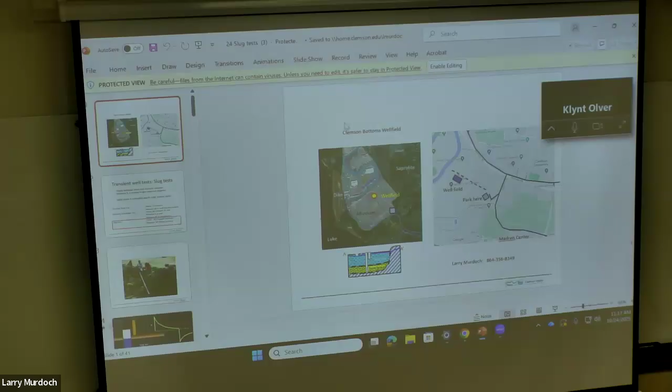So the plan we talked about last time was to meet next time out in the field to learn about conducting a slug test. That'll be what you'll do for homework 10.

I've been checking the weather forecast, and it looks like this nice stretch of sunny, warm weather we've had is going to be leaving. Right now the forecast for Monday is mid-50s with rain, 90% chance of rain. I don't want to do this in weather like that - it would be unpleasant.

It may change, the forecast may change, but I'm thinking we probably won't be going out on Monday. We'll have to push it back. Maybe Wednesday - the forecast right now for Wednesday doesn't look all that much better. So this might get pushed back to Friday, a week from today.

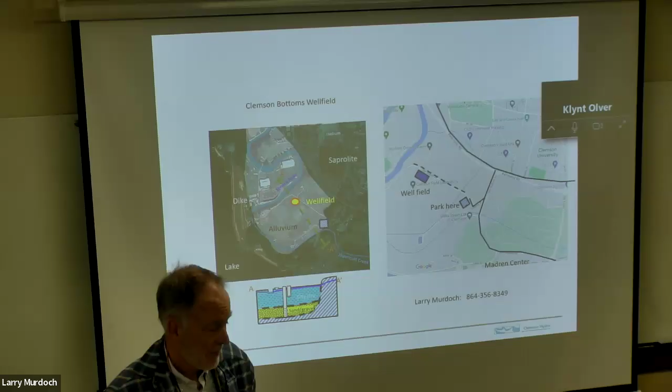It's kind of a grassy field, a pretty nice place, but if it's wet you want to wear the right kind of shoes, and if there's a chance of rain you'll want to wear something appropriate. So you want to know ahead of time to be ready. If I send out an email on Sunday, is that sufficient time to be ready?

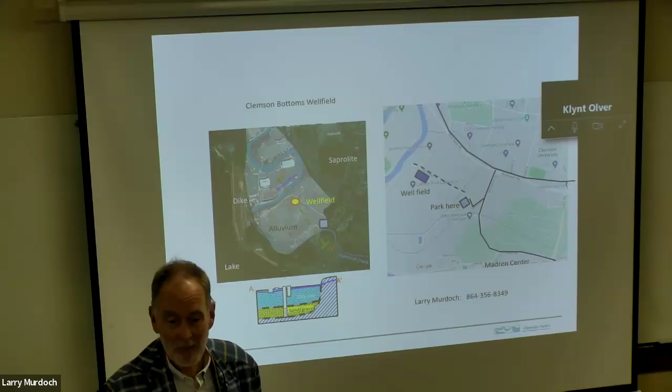All right, so I'll do that. And if I say it's a go on Sunday, and then it's actually raining Monday morning, I may cancel it and postpone it. We've done it in the rain before, and we don't want to do that. So stay tuned Sunday.

I'll send out an email on Sunday saying that we're going to go. If you don't get that email, then we'll meet here. So the default is here, not down in the field site.

On the handout there's a map to get to the field site. This is Perimeter Road. We're like right here - Perimeter Road, and then Madren Center, Old Stadium Road here. There's a traffic light right there. I think there's a new road that comes in now. So you can come here if you're driving, come here.

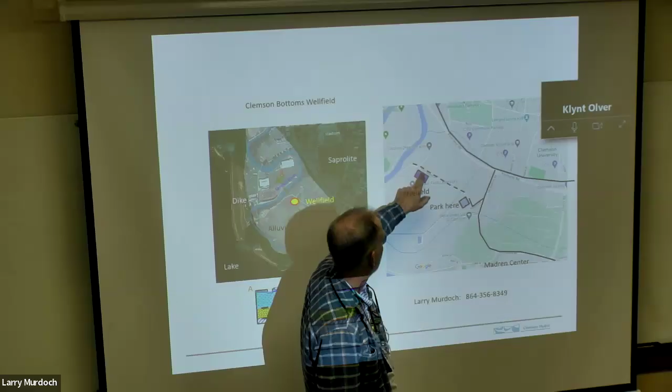This is a gravel road, and there's parking down here. So come in here and park right there, and then this is a gravel road - you need to park here and walk in. The well field is right here. If you're walking, come down here, and there's an embankment here. You may be able to get down that embankment - there used to be stairs, but I'm not sure about that. You can come in this way if you're walking too.

So this is a map of there, a location map. This is more of a geologic map. Lake Hartwell is out here, and this is the dike for Lake Hartwell. This area right here, even out kind of this region right here, is below the level of the lake.

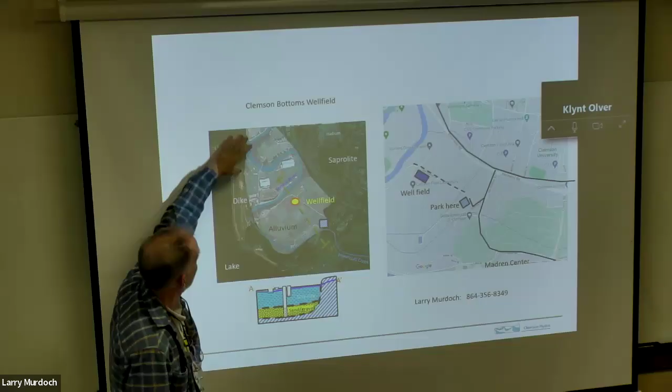So here at the well field, we're about 10 meters below the level of the lake. The Seneca River was like, it's here - it's cut off by the dike. And there's another dike up here that you see when you go along 93, and that cuts off the other end of the Seneca River. So this area right here is the floodplain of the Seneca River, the former Seneca River - it's not really just a little piece of the Seneca River anymore.

So this is all alluvium, like what we talked about from the coastal plain. It's a bit different than what we typically have throughout the Piedmont. We talked about the Piedmont conceptual model, and here it's more like the conceptual model from the coastal plain.

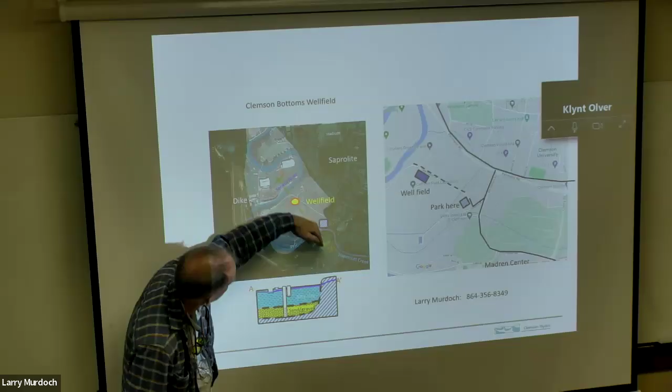So there's a cross section right through there, and this is the cross section. Here's the Seneca River right there, and then this is the well field. We have wells that go down here into a sand and gravel layer that's about 30 feet deep. It's about 10 feet thick.

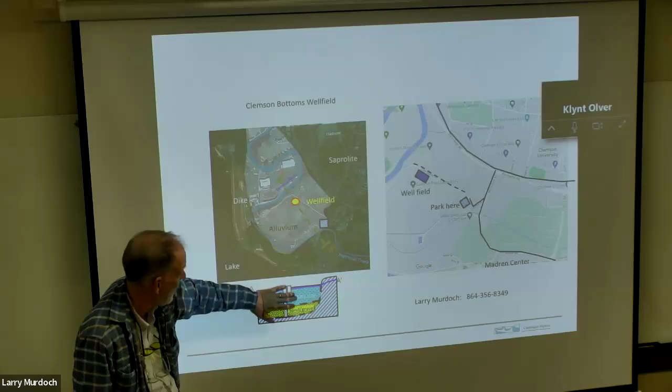And that's this confined, semi-confined aquifer. Then over that is some silty clay, and the water table is very shallow - it's just a couple feet down here. So the water table is right here.

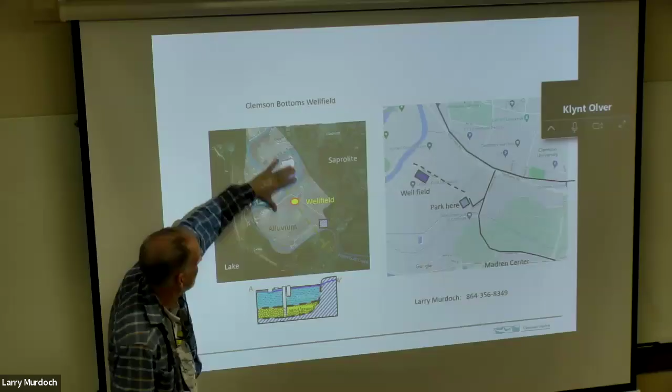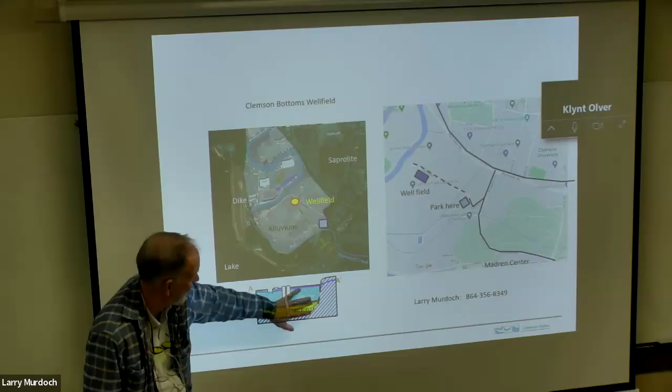This is all sediment that was deposited from the old Seneca River. The Seneca River was meandering back and forth over this whole area, eroding and then depositing this sediment. So it eroded out here—this is saprolite, and the river eroded it out and then deposited sand and gravel, and then finer grain material on top of it.

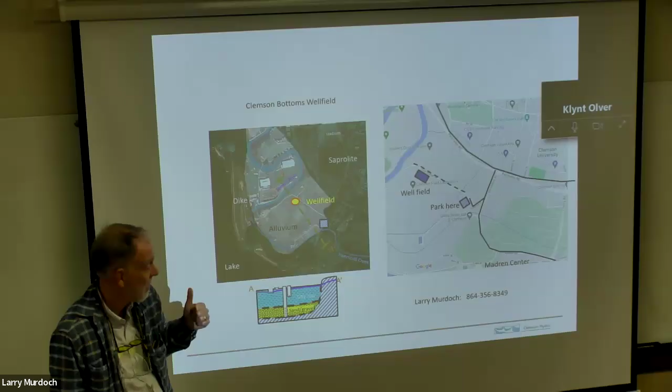So what we're going to do is test wells—some of them will be in this sand and gravel, and the permeability is really high. And then we have some wells up here that are shallower in this lower permeability, and we'll also test those. Okay, so that's the plan.

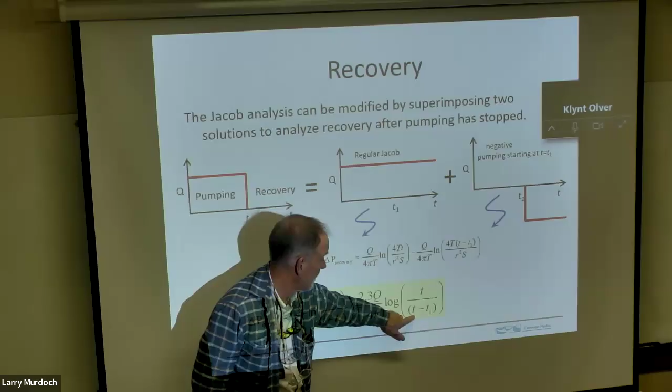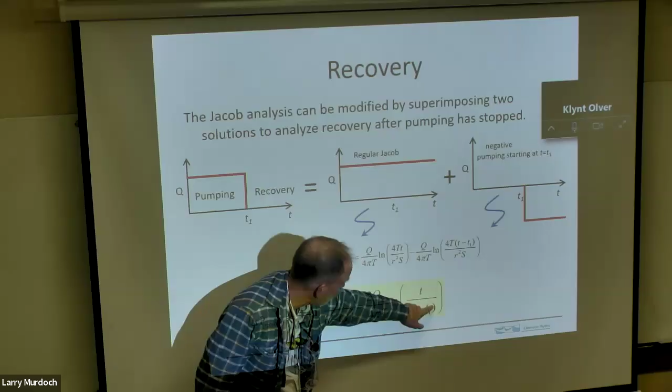What we saw is we could use superposition in time, and it gave us an equation like this, where we have this as a function of time divided by—this is the time since pumping started, and this is the time since pumping was stopped. That is the actual time when pumping stopped, and this is the time since pumping started. So basically what this is, is time that starts right here—this is 0 right here, and then it increases as you go on.

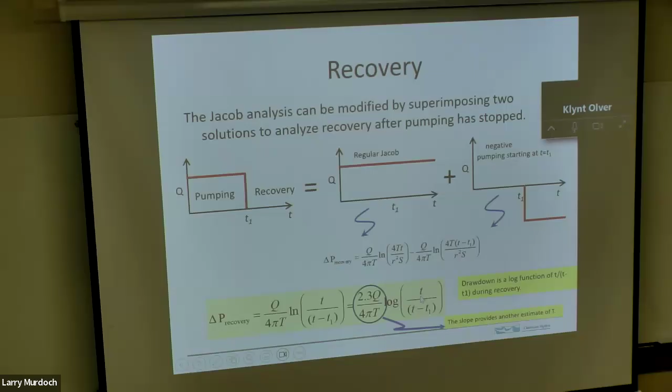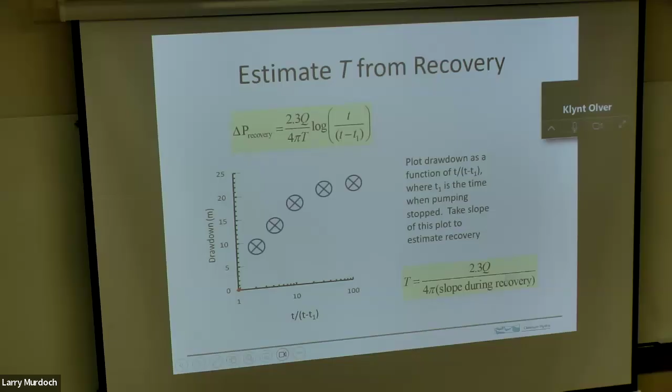There it is. Okay, so we went through this—here's the semi-log slope. I think when we did this, we saw that there was a slope of 9, and then when we did this one, it was a slope of 10. So a little bit different values for slope.

All right, so there are a couple more things that we're going to want to get from the constant rate test.

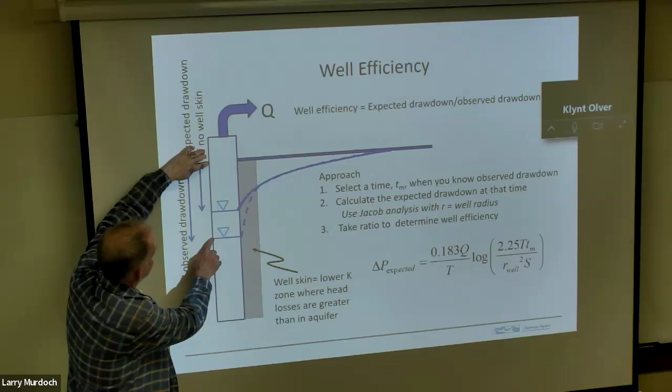So it's this drawdown divided by that. When the drawdown we're actually seeing is greater, we have a well efficiency that's less than 1. That means there's some kind of skin around the well.

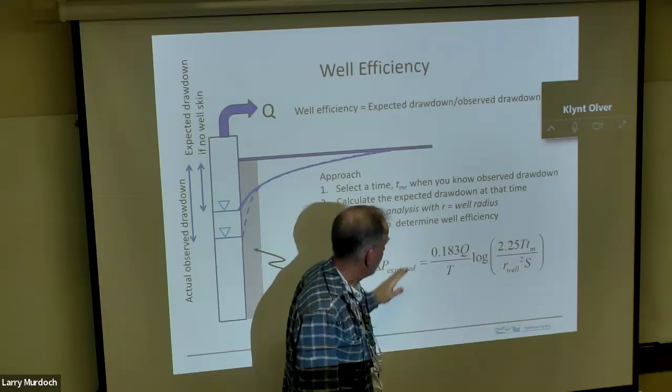The way we calculate that is to do the analysis we saw last time, where we fit the semi-log slope and get T from the slope, and from the intercept we get S.

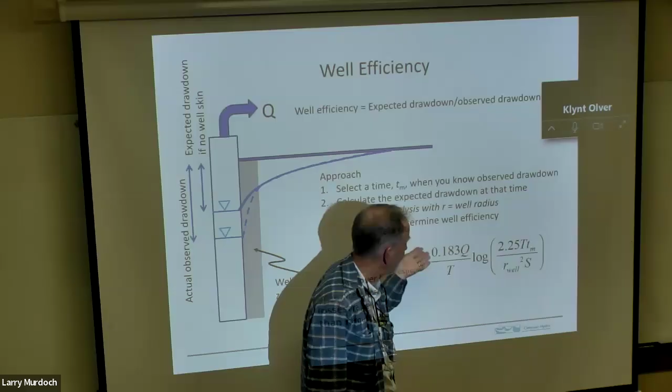Then we take the results of the test, typically towards the end, and use this equation to predict what we think the drawdown should be at the well. The important thing is that we put in the radius of the well, and there'll be some time when we measure the drawdown, and we want to use that same time here.

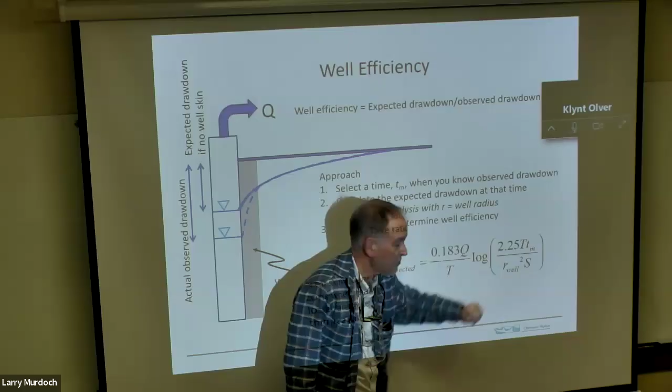So we put in that time, put in the radius of the well, and predict what the drawdown is. This is the drawdown expected if the entire formation has these properties. We do that calculation, take the ratio with the actual measured drawdown, and that gives us the well efficiency. That allows us to relate the drawdown we would calculate from what actually happened.

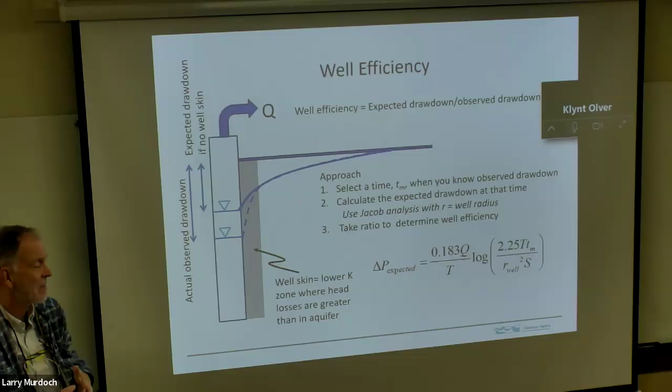Another effect we want to evaluate is well performance and longer term well performance. The kind of results we've been looking at here we can get from pumping the well for an hour, a few hours, short term, maybe a couple days. But if we use the well for the long term, our assumption for the analysis is not going to hold.

Our assumption was that the aquifer is infinitely large in lateral extent. So we start pumping, the drawdown goes out, and so long as the aquifer is uniform and we don't encounter any changes, the well thinks it's in an aquifer of infinite extent. No aquifers actually are, but if the actual extent is much bigger than the radius of influence, then the well thinks it's in an aquifer of infinite extent.

We can use the analysis. But the longer we pump, the bigger the radius of influence, the more likely we're going to interact with some boundaries. And that's going to change the well performance compared to what we were analyzing when we assume it's infinite.

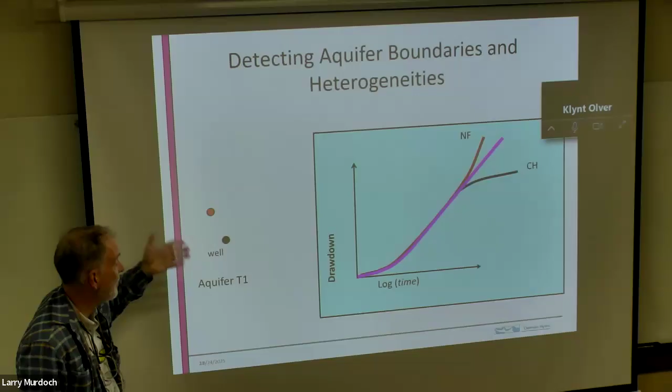Similarly, if this is a stream and this is a shallow aquifer, then when the drawdown reaches the stream, we can get water out of the stream instead of out of storage. That means the drawdown could be less than it would be otherwise. So those are some things that can affect the drawdown.

In all three of these cases, up to a certain time, the well thinks it's in an infinite aquifer. It doesn't know about the boundaries yet, so we can use this to estimate the aquifer properties. But after that happens, the slope is no longer going to give us the transmissivity.

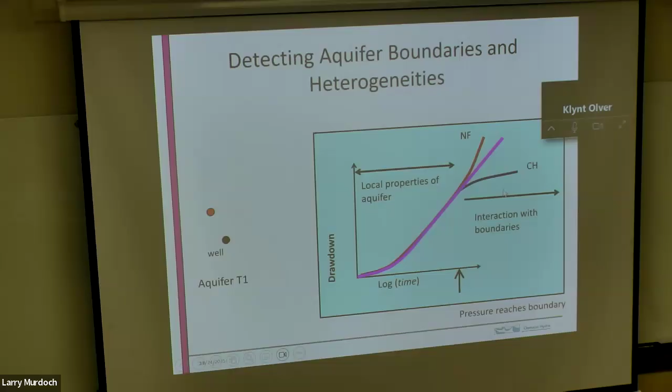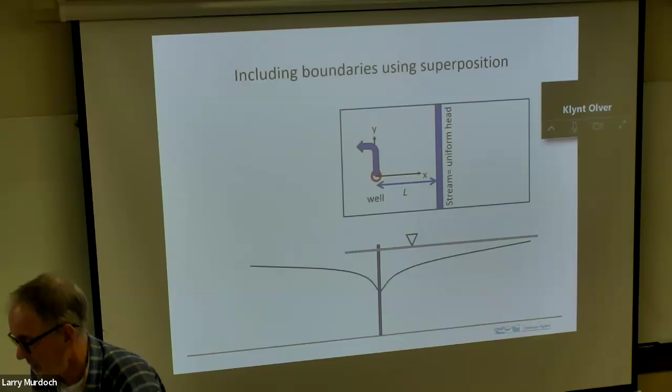So we can analyze this case too. We can do the analysis where here's the well, here's a boundary, and we can use the same process of superposition that we used for recovery. What we did before was superposition in time, but here we can do superposition in space. So this is a cross section of a well with the drawdown, and it's infinite extent, so it's just continuing on.

So the way that we include a constant head boundary right here is we use what's called an image well. This is an imaginary well that we put in here, set away from the boundary the same distance that our well is from the boundary. So if the well is a distance L from the boundary, then this image well is also a distance L from the boundary.

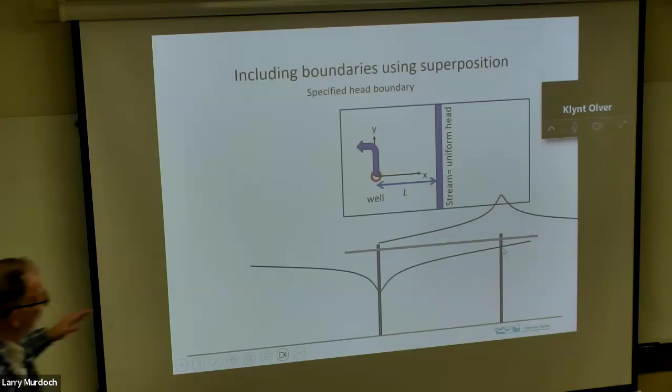It's a distance equal to 2L from this well. Put in that image well, and we say that if we're pumping out of this well, then we're pumping into this well. So if the water level starts here, at some time the water level from this well has dropped to here. But here, if we're injecting, the water level rises and it looks like that.

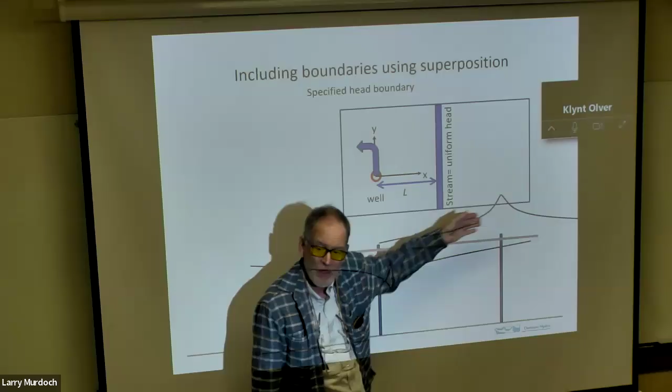I just took these lines and flipped them over and dragged them over here because these curves are the same, just mirrored and slid over here. But the important thing to see is that right here, the drawdown is equal to the buildup here. These are equal, so if we add them together, it's 0.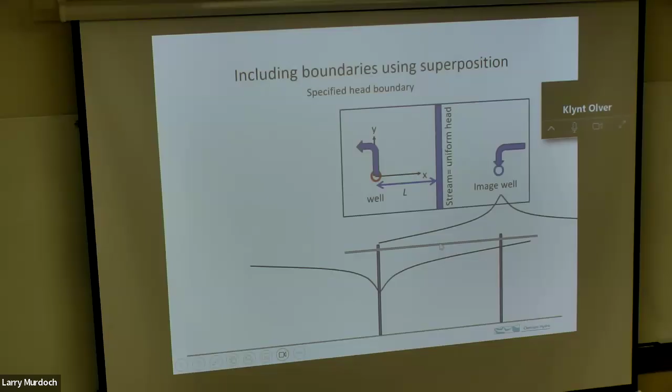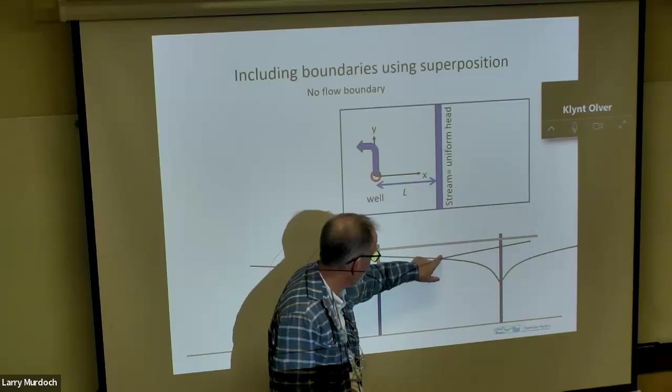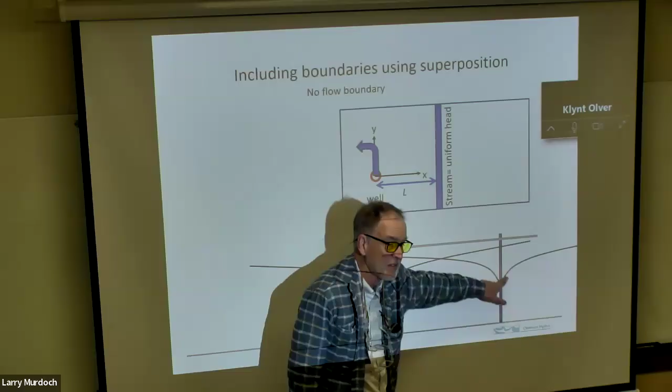So we add these two functions together. There's the image well. If we add them together, the drawdown will be equal to 0. If we do this, and we say this is a pumping well, that's a pumping well, and we add these two together, then we get more drawdown here. But the thing we see here is that the drawdown would look like that, so there would be a no flow boundary right here. The slope would be 0. So we can do this kind of superposition to make a no flow boundary.

We do the other kind of superposition, where this has an injection well, to make a constant head boundary.

Here's the way we can set this up as an analysis. We say that the total drawdown is equal to the drawdown from the well and the drawdown from the image well. So here's the well, just the Jacob analysis, and then here is the well where we go from r squared to x squared plus y squared. We've got to use an xy coordinate here, and that's just the change that we do there.

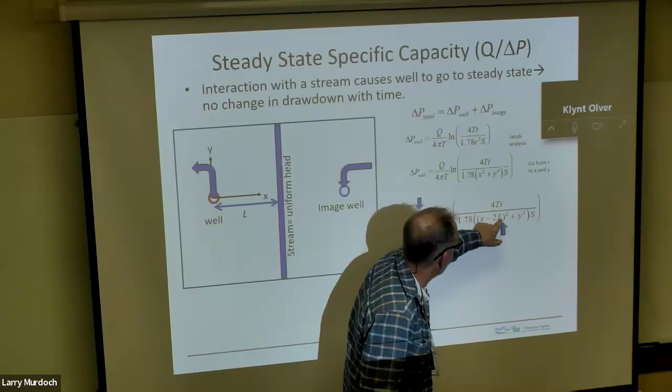There's the image well. For this image well, what we're going to do for the drawdown, we're going to change the sign, and then instead of x squared, we make it x minus 2L squared. X minus 2L is just like taking this well here and sliding it over to here. So this is the equation for the drawdown around the image well, essentially identical with the change in sign and this slight change in the coordinate system. But that's the key difference.

So we put these two together, and there's the x squared, y squared, there's the x minus 2L squared, and there's the negative sign. When we bring these together, we have the log function, and if we take this log minus that log, it's basically going to be the log of this times 1 over that. That's what you get when you factor out this thing, and then it's log of that minus log of that, and it just becomes basically this divided by that. There's the x squared, y squared in the denominator, and there's this thing here in the numerator. That's what you get for the drawdown.

Here's that result. If we take it, we say y is equal to 0. What we want to do is get the drawdown at the well, so y is equal to 0, and x equals the radius of the well. Let me show you how to. So we say y is equal to 0 at the well, and x equals RW.

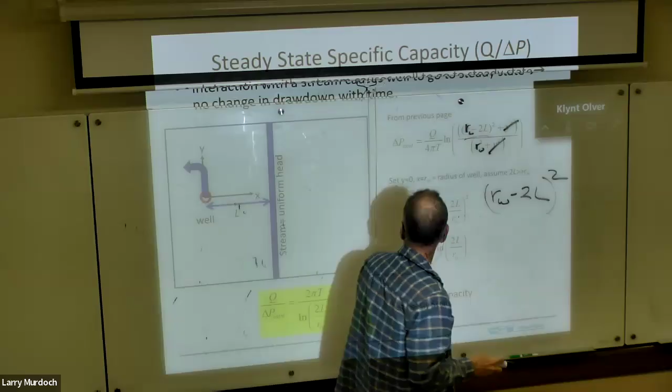So right here, we have RW minus 2L squared. What we're trying to do is get this simplified so it's more convenient for calculation. This is the radius of the well right here, and 2L is this distance. So RW is way smaller than 2L.

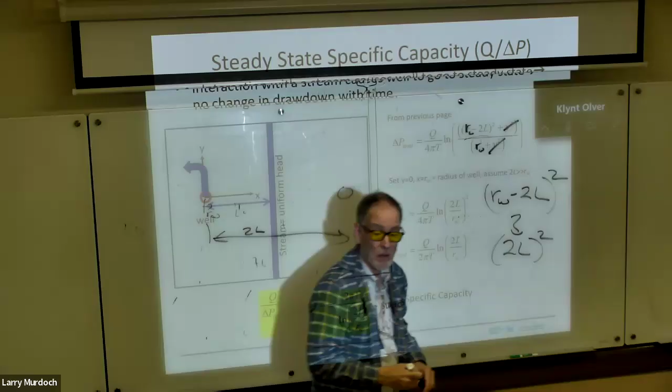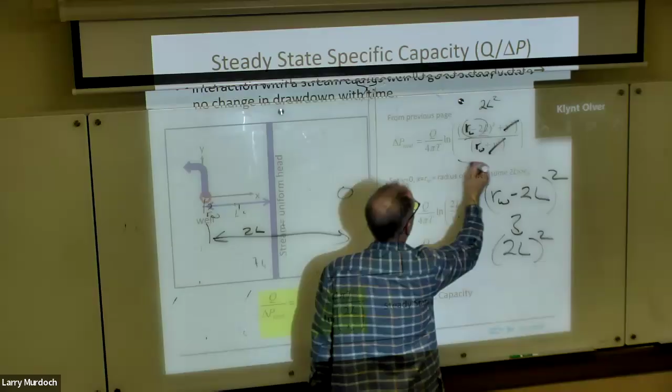So if we take the difference of this, we can just say that this is going to be approximately equal to 2L squared. So this thing then becomes 2L squared, and this is RW squared. So this thing here just goes to that.

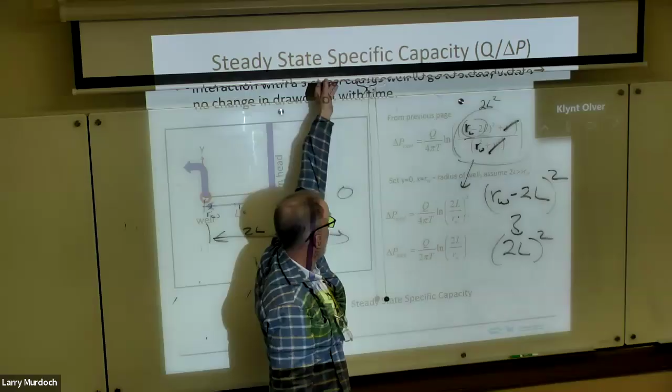And if you take the log of this stuff, the 2 comes down and you have that. So this is the total drawdown here at this well as a result of this boundary.

So what we can do is go back and recall this quantity of specific capacity. This is the pumping rate we can make from a well as a function of the drawdown, so the ratio of pumping rate to drawdown. We bring this over here and invert it, and that gives us the steady state specific capacity.

So if we want to evaluate the performance of the well in terms of how much water it might be able to produce at steady state, we can do this calculation, and this gives us an estimate of the drawdown based on this ratio.

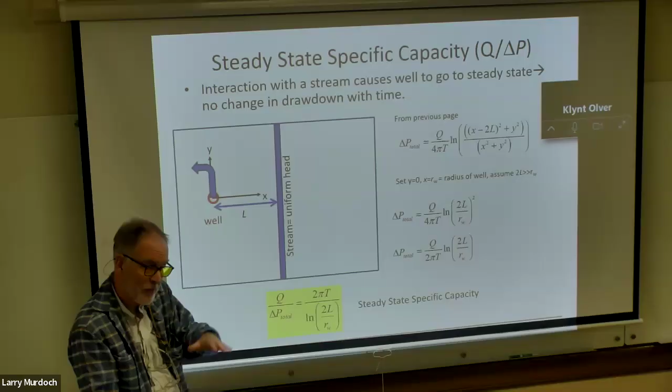So in order to get what the actual flow rate is, we need to say what kind of drawdown we're able to tolerate. This is based on how deep the pump is. We have to keep the water level above the pump, usually several feet at least. So we specify the maximum drawdown we can tolerate, and that allows us to estimate Q.

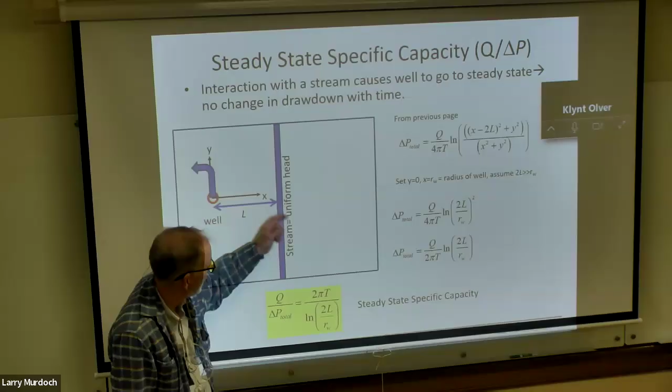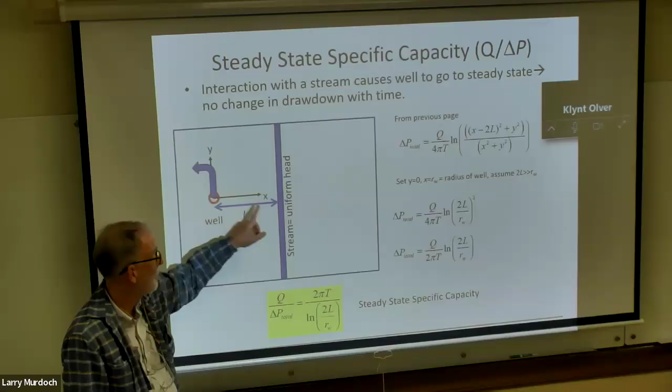We go through and do the analysis, come up with T like we talked about, and then what we need is the radius of the well and this term L, which is just the distance to the stream. So this gives us another simple way to evaluate a pumping test and estimate the well performance.

So we had this as an example, and we've done the analysis for T and S and the recovery. I went in and did this out by hand.

Here's T and S, and then the well efficiency. This is the well efficiency calculation. This is the Jacob analysis.

I have the drawdown after 1,000 minutes. I think this is in the handout. We're given the drawdown after 1,000 minutes. The radius of the well is 0.25 feet. This would be the handout from yesterday or from last time.

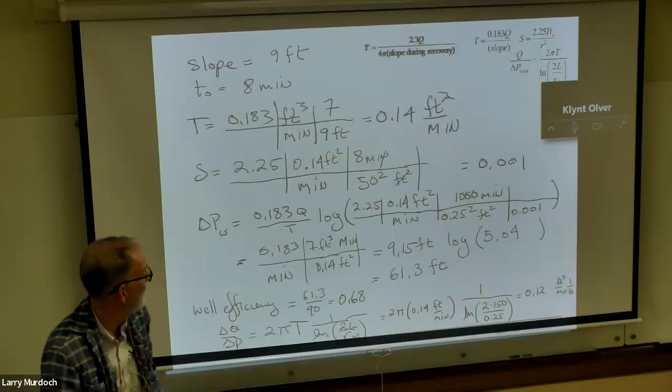It looks like what's given in the handout is that the drawdown after 1,000 minutes of pumping is 90 feet. Does that sound right from last time? I don't remember getting this handout. Yeah, it's this handout. So the drawdown of a well is 90 feet after 1,000 minutes, from last time.

So there's 1,000 minutes for the time, this is the radius of the well, and we go through and do the calculation.

I calculated this part here, writing the units out, and got 9.15 feet. And then the log here, this is going to be dimensionless. This part here, the units have to all cancel out. That's one of the rules for the argument of a log.

So we can check and make sure that's the case. I wrote this all out with the units just to check. And then I got 9.15 feet from this coefficient up front and log of 5, and it ends up being that. So 61 feet of drawdown is what we would expect if the transmissivity is equal to that everywhere. In fact, we see that the drawdown is this, so we take the ratio, and that's the well efficiency.

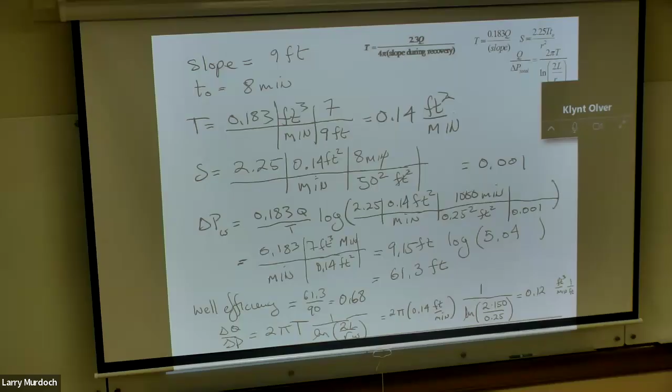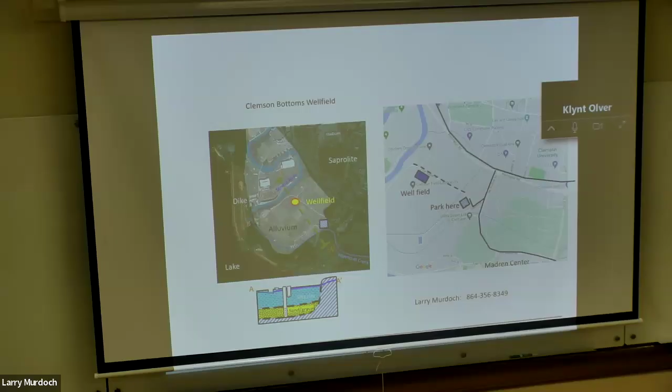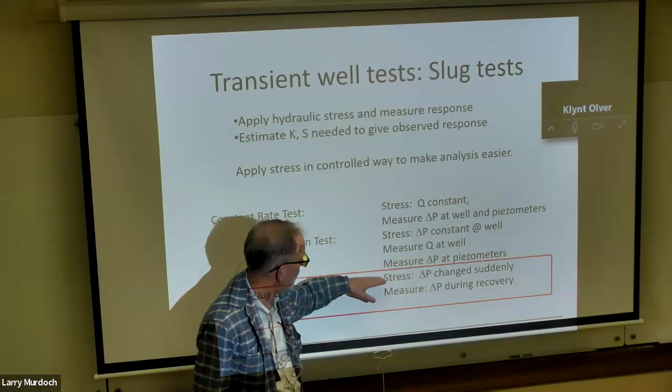Okay, so what we're going to do when we're in the field is conduct a different kind of test. This is called a slug test. We look at constant rate tests, and the slug test is the response of the aquifer to a different kind of stress. In this case, we're going to change the drawdown suddenly and see how the aquifer responds to it.

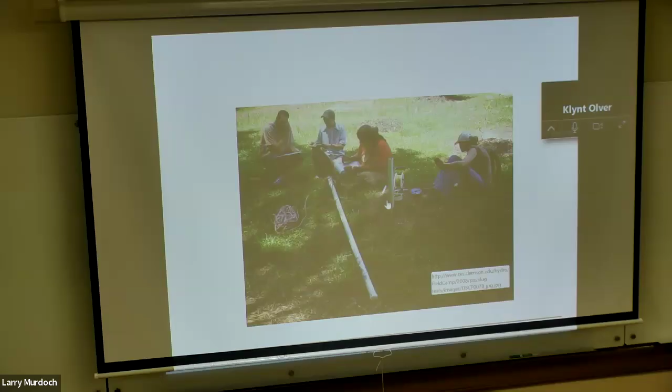So what's being done here is to take this weighted cylinder and drop it into the well, and it'll displace the water. The water level will rise as we drop it in the well. I think here's a graphic. So we take this cylinder, drop it in the well, and that raises the water level.

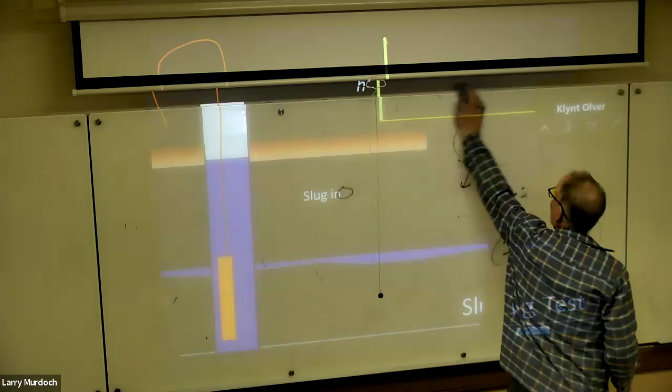So we start out here, and this is the initial water level. The system is in equilibrium, and we drop the slug in. That displaces the water up here. So at this point, we've got a big difference in the hydraulic head.

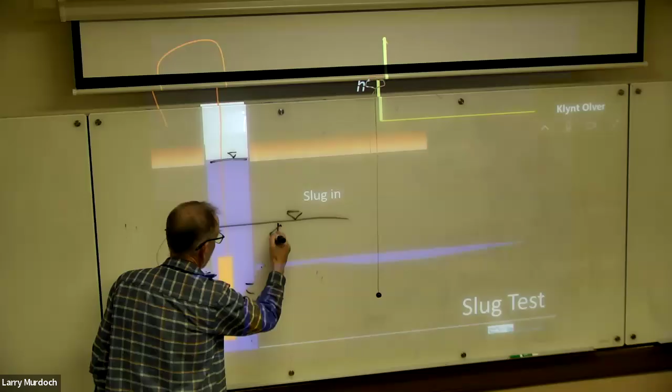Here's a confining unit, so the screen is here. The head right here in the aquifer at that point is there, but in the well it's here. So there's a big gradient in hydraulic head between the well and the aquifer, and that causes water to flow out into the aquifer, which causes the water level to drop.

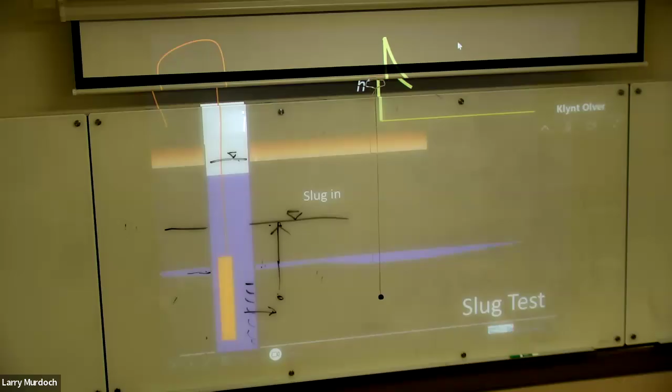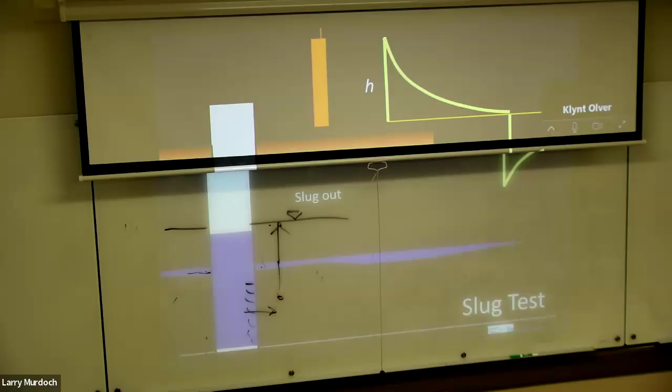Up here, this is the hydraulic head, so the head in the well is dropping, and it keeps dropping, and then we pull it back out, and the water level drops as a result of the slug coming out. Then the water level is now below the static water level in the aquifer, and it comes back up.

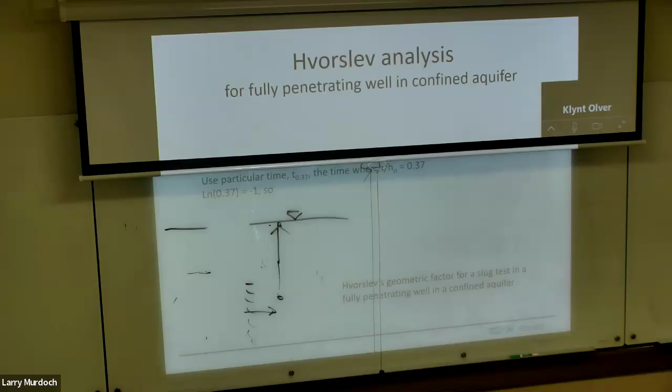Got it. Okay, so what we want to be able to do is analyze this, and there are a couple of different ways of doing this.

What you find is that this decay is like a negative exponential, like a constant times e to the minus a t. So it's starting out at this level when we start keeping track of the time, and the water level drops with time and decays back to the original. The response to this slug test is just like an exponential decay process.

So if we write this as a semi-log, if we write it like this, then this will be minus a t plus a constant. And this ends up, and if we plot it as a semi-log where it's a log scale on y, then this becomes a linear function.

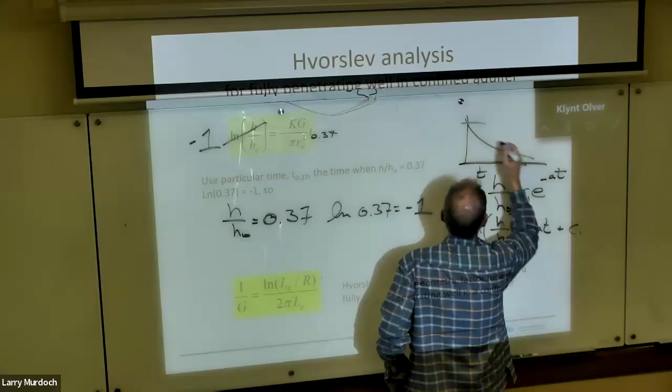The way to think about that is that this is 1 — this is h over h0, and h0 is the starting head. The initial head at time 0 is equal to h0. So it starts at 1 and then decays down, and 0.37 is right there, so it's decayed to 37%. Go out there to there, and that is t sub 0.37.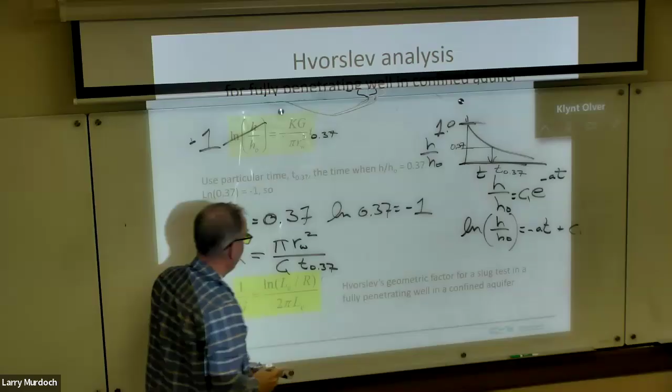Okay, so we do a slug test, we measure the head as a function of time. We get this particular time when the head is decayed to 0.37.

That goes there. This is the radius of the well, and this is the geometric factor. It depends on the geometry. I'll show you some examples.

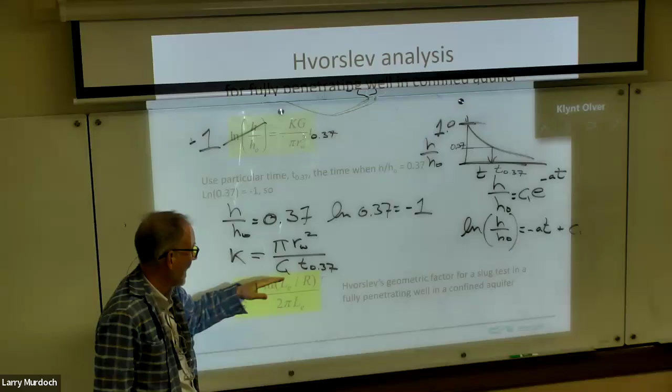Here's one case that was developed by this guy Hvorslev, and he was really one of the pioneers of slug test analysis. This work was back in the 50s and 60s. He came up with this geometric factor along with a variety of others, and he gets a named equation. The Hvorslev analysis of slug test is the simplest, and it's probably the most common analysis of slug test.

So in addition to Hvorslev, Hvorslev is that particular analysis. Let me go back a second. That particular analysis is for this case.

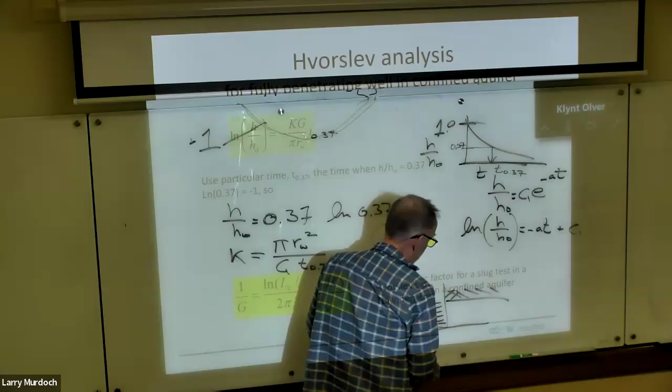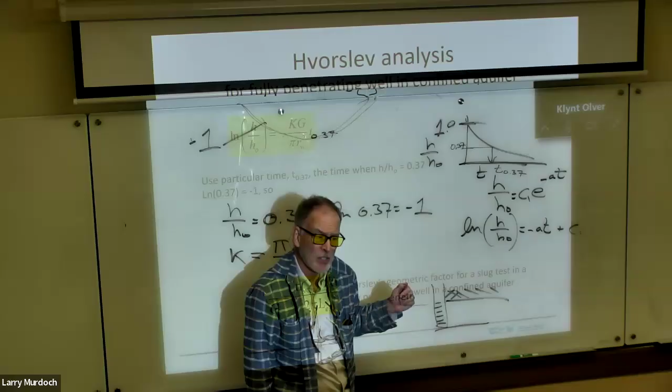This is the geometric factor for a fully penetrating well in a confined aquifer. So we have something like this. Here's the confining unit, and the well screen goes completely through the aquifer. The screen could be short, and it could be up at the top or at the bottom. There are a variety of variations on where the screen can be within the aquifer, and those change the geometry. Having a well where the screen fully penetrates is the simplest geometry, and that's what Hvorslev did.

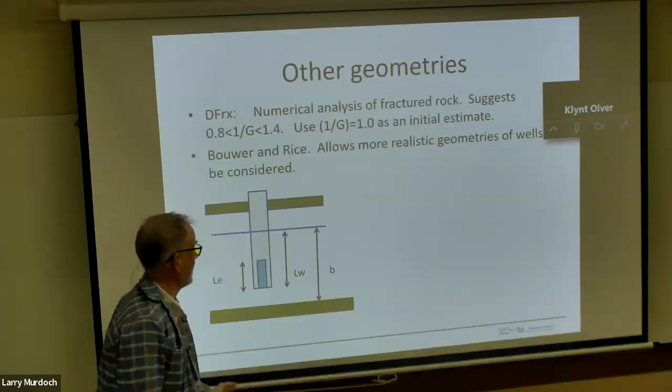There are more complicated geometries. A more general case looks like this, where the screen is here, and that's LE. Then the screen is down below the water table, and above the bottom of the aquifer.

So to describe this geometry, you need to know the well screen, how deep it is, and how far above it is. So the three lengths are: this length here of the screen from the water table down to the bottom of the screen, and then B is the entire saturated thickness of the aquifer. So if we wanted to analyze a geometry like this, we can do it with the analysis from Bouwer and Rice. That's a more realistic geometry, and we can then calculate a geometric factor that allows us to simulate or account for this geometry.

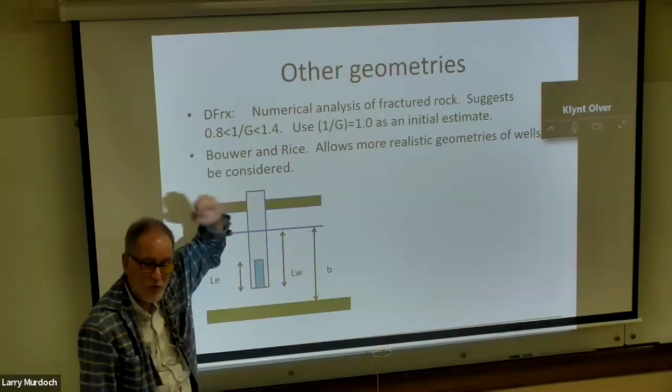We have another geometric factor that we came up with using a program that we developed called DFrx, and it gives a geometric factor between 0.8 and 1.4 for fractured rock. You can approximate it as 1.0, which makes it simpler.

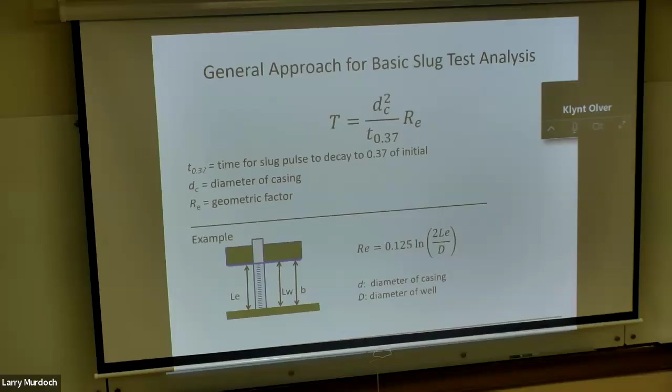So here's the way that it's going to work. The transmissivity for what I would call basic slug test analysis—Hvorslev, the Bouwer and Rice, and the DFRAC—those are all what I would call basic slug test analysis. The transmissivity is going to be: this is the diameter of the casing squared, there's that t0.37, and then this is the geometric factor.

Okay, so this is the Hvorslev analysis, and here's the geometric factor for that case.

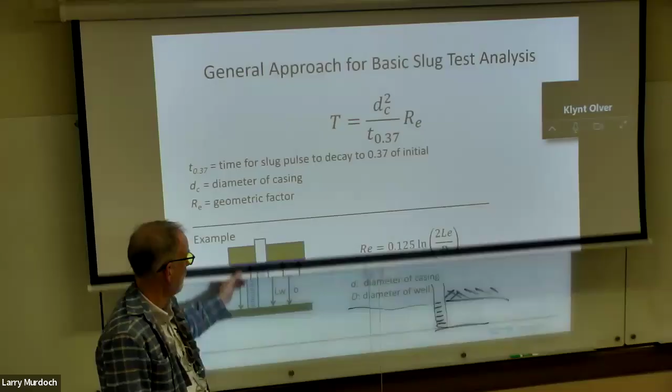One other point here is that for the slug test analysis, we need to consider a well—so here's a simple sketch, but when we saw wells being constructed, we saw that many wells are going to be built like this. So this is a seal, and there's a sand pack here, and then this is the casing.

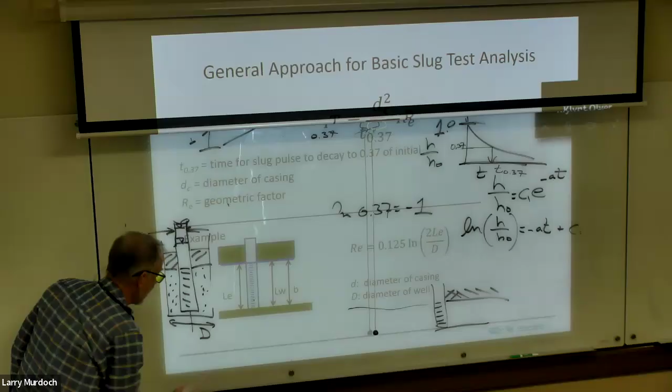Okay, so this is the diameter of the casing here, and if we have a water level that starts here and goes up to here, the volume that is involved in the slug test is determined by the diameter of the casing. But this is the diameter of the gravel pack. So when the well is interacting with the aquifer, another diameter that's important is the diameter of the gravel pack. In the analysis, that's called capital D, and this is called lowercase d.

Okay, so here's the basic analysis, and on the handout, I gave you an example that we want to go through. This is going to be the Hvorslev analysis. We can go through and give it a try.

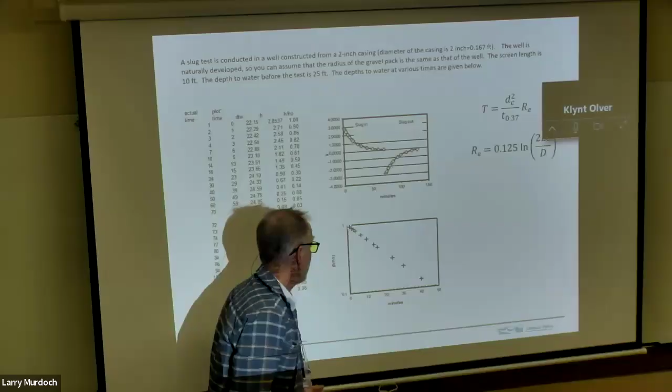What you get when you take this equation and plot it on semi-log paper, where this is now a log scale, it makes that curve straight—makes that exponential function a straight line with a negative slope. So what you do is plot the data on here. These are measurements from the field, and fit this with a straight line. Then here, 0.1, 0.2, 0.3, 0.37 would be like right in here. Hit the fit line and then go down to get the t0.37.